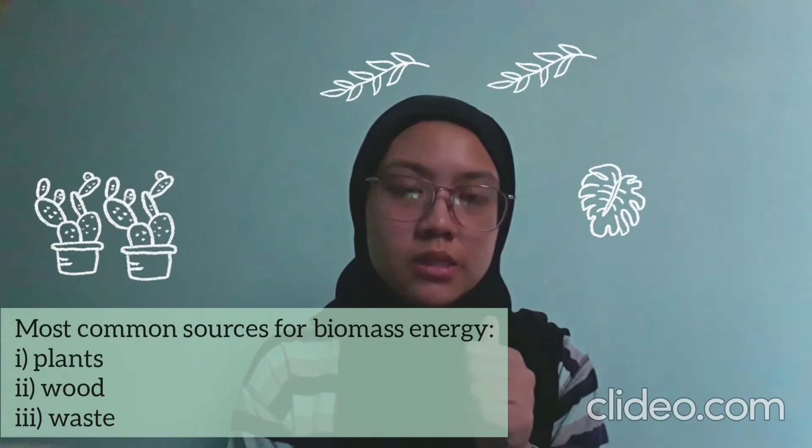Biomass contains energy first derived from the sun, and plants absorb the sun's energy through photosynthesis, converting carbon dioxide and water into nutrients, which is carbohydrate.

The energy from this organism can be transformed into usable energy through direct and indirect means. Biomass can be burned to create heat, which is direct, converted into electricity, which is direct, or processed into biofuel, which is indirect.

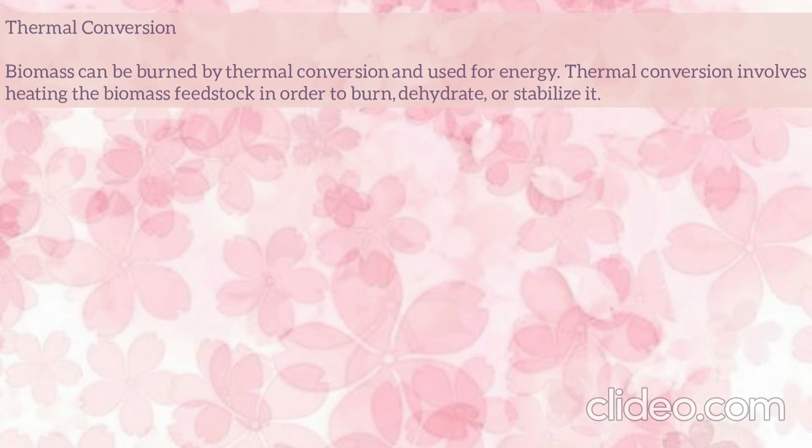Biomass can be burned through thermal conversion and used for energy. Thermal conversion involves heating the biomass feedstock in order to burn, dehydrate, or stabilize it. Different types of energy are created through direct firing, co-firing, pyrolysis, gasification, and anaerobic decomposition.

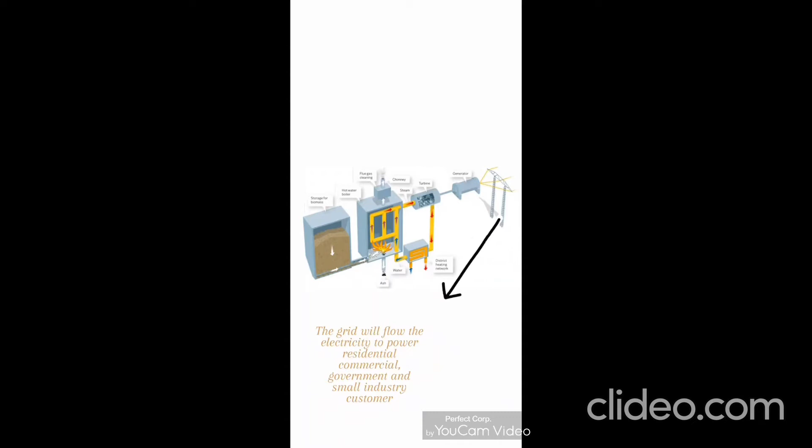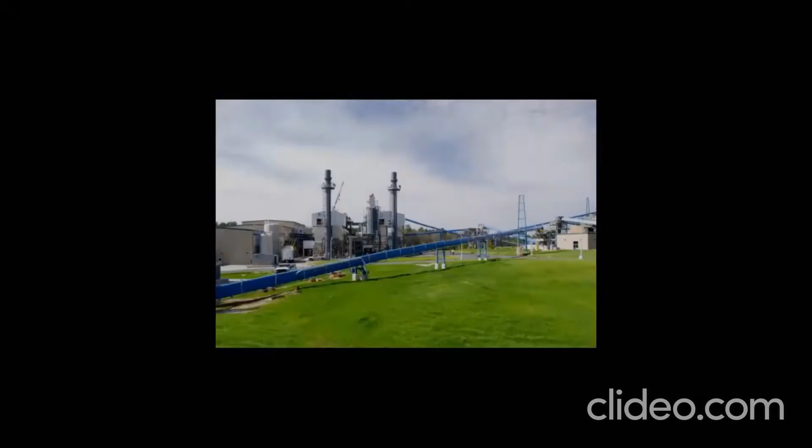Japan: biomass energy produced, 35,253 GWh.

Historically, humans have harnessed biomass-derived energy since the time when people began burning wood to make fire. Even today, biomass is the only source of fuel for domestic use in many developing countries. Biomass is all biologically produced matter based on carbon, hydrogen, and oxygen.

China: biomass energy produced, 44,437 GWh. As an energy source, biomass can either be used directly via combustion to produce heat, or indirectly after

converting it to various forms of biofuel. Conversion of biomass to biofuel can be achieved by different methods, which are broadly classified into thermal, chemical, and biochemical methods.

United States: biomass energy produced, 48,563 GWh. It has become popular among coal power stations, which switch from coal to biomass in order to convert to renewable energy generation without wasting existing generating plant and infrastructure.

Biomass most often refers to plants or plant-based materials that are not used for food or feed, and are specifically called lignocellulosic biomass. Germany: biomass energy produced, 50,000 GWh.

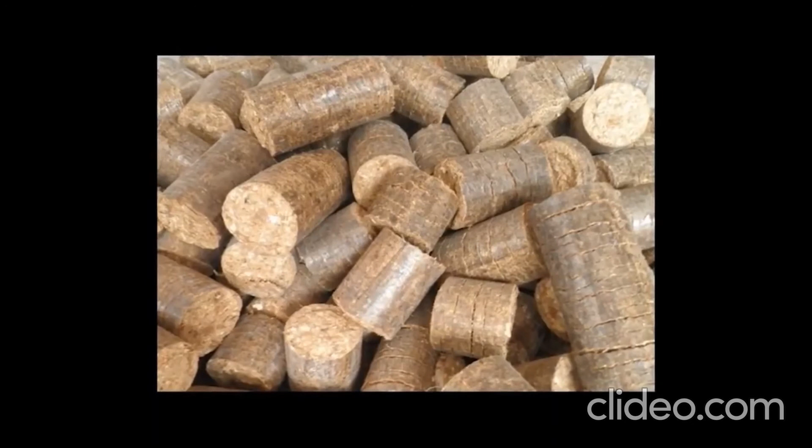Biomass is an industry term for getting energy by burning wood and other organic matter. Burning biomass releases carbon emissions, but has been classed as a renewable energy source in EU and UN legal frameworks, because plant stocks can be replaced with new growth.

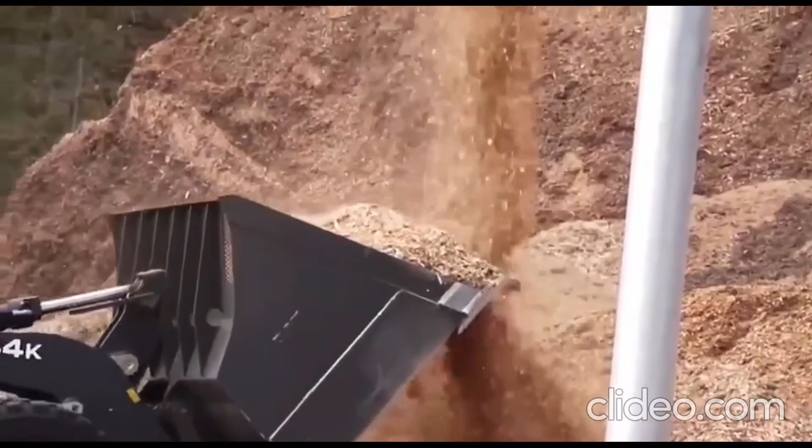A biomass power plant generates electricity using the heat generated by the combustion of organic materials, such as plant residues, household waste, and the biogas resulting from waste fermentation. All of these are renewable energy sources available in large quantities.

The fuel is brought to the boiler. It is then introduced into the combustion chamber where it releases heat as it burns. This in turn heats water in tubes that line the boiler.

The hot water is then sent to a tank where it turns into steam. The steam drives a turbine which turns a generator.

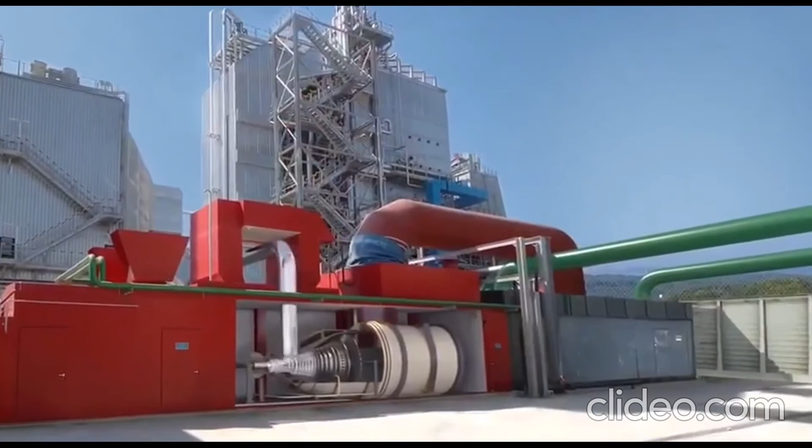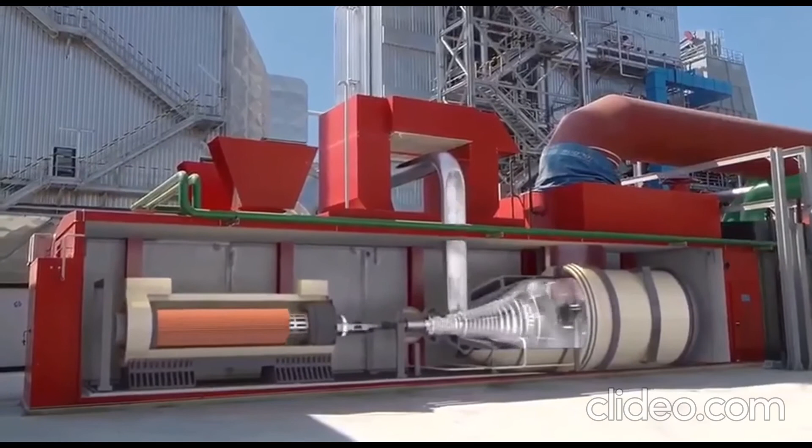In the generator, the interaction between the electromagnets of the moving rotor and the copper coils of the stationary stator produces an electric current. A transformer is used to increase the voltage of this current to 225,000 or 400,000 volts.

This makes it easier to transport in the network's very high voltage lines. The steam leaving the turbine passes through a condenser in which cold water circulates.

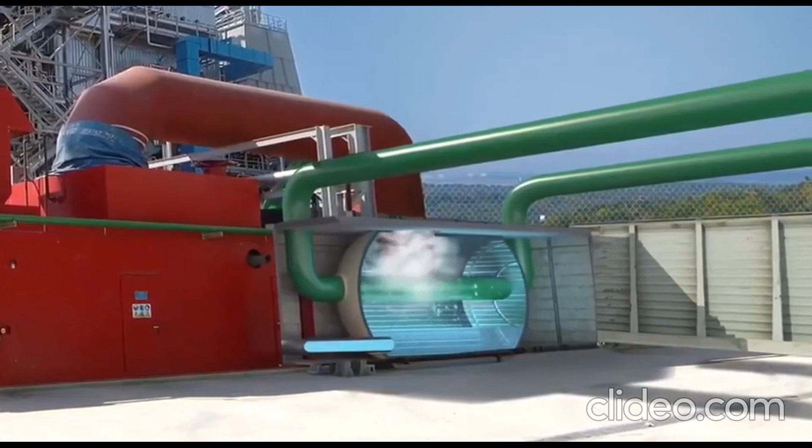This cools the steam, turning it back into water. It is then sent back to the boiler. This steam can also be used either for industrial activities or to supply an urban heating network.

This simultaneous production of electricity and heat in a single facility is called combined heat and power. Finally, the fumes released by combustion are filtered before being evacuated through stacks.

Often installed in very close proximity to material production or storage sites, biomass power plants can be used continuously to meet electricity needs whatever the day of the year. They produce regular energy with low CO2 emissions.